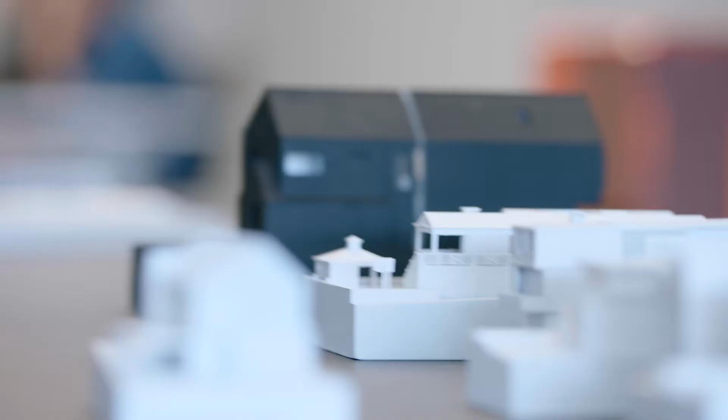We're seeing the architecture community move more toward the model of the film industry, where there are bigger teams, people are more open to collaboration, and rather than a masterpiece being the identity of a lonely expert, it's really the result of a healthy team.

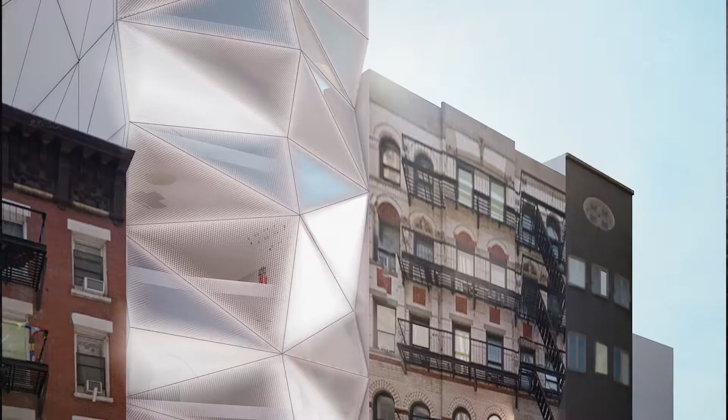If I come to you and say I want to do a building, well that's great. Yeah, but I need it done in 4 months because the bank is charging me interest. If I tell you that's impossible, are you going to listen to me, or turn around and find an architect that will?

Traditionally, the architect is engaged by a developer once the land is secured, but we're pushing on that. We're pushing to have that relationship be cultivated more long-term and earlier so that we can be part of the actual premise of the project itself.

Many developers would approach us and say, what can I build here? Many times they aren't interested in quality, or many times are truncated in their process by the people they owe money to make the project happen.

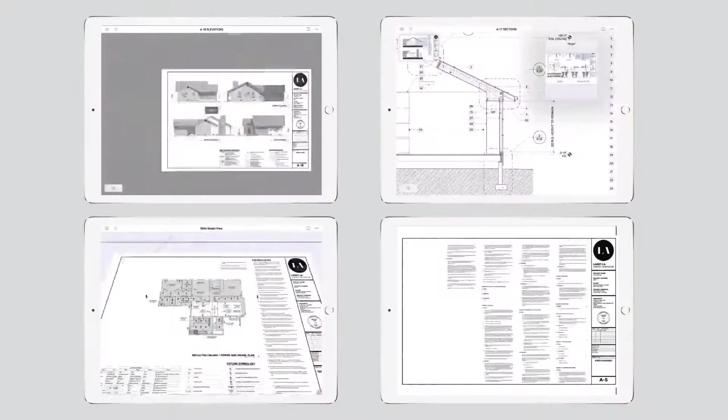I think we're seeing a small reaction to that now, because our workflow enables us to very quickly explore high-level design ideas. We're suddenly upstream and we have a seat at the table in the early conversations. The business owner in me loves that because I can have a seat at the table for a potential client.

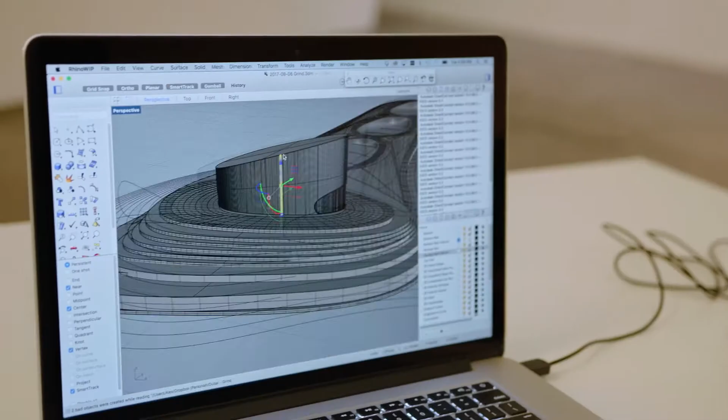But the architect in me likes that because I can not only define the solution downstream, but the premise upstream. If you realize what these clients know sometimes isn't more than a bit of arithmetic and where to get the money, if you take care of that in your organizational structure as an architecture firm, you have a chance of being in control of a project.

What if we purchase the land ourselves, we raise the capital, we build the building ourselves, and we control the economics and the physical reality of the building? In a sense, create a soup-to-nuts, self-sufficient design and development firm.

It takes a willingness of a new school type of architect to want to be able to play outside of the normal box, to be able to collaborate in real time with bigger teams. I like that our industry is going that direction.

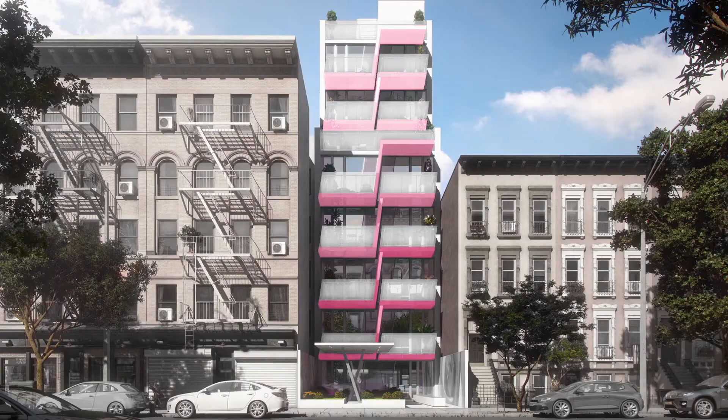We have a real estate and finance team that can find properties and also financially analyze their feasibility in terms of whether or not they're a deal, whether or not they make sense to invest in.

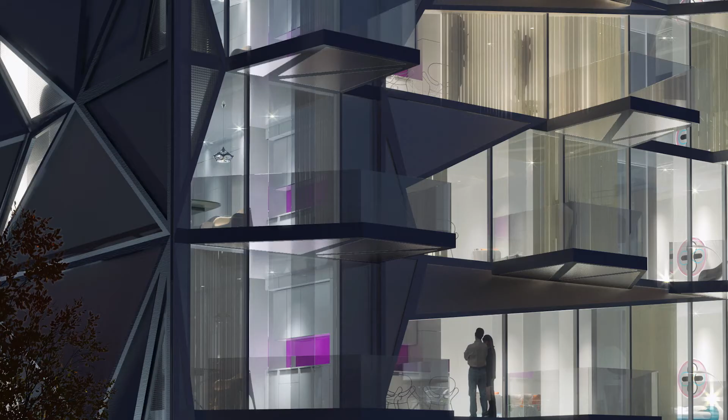Where do we want to invest ourselves as designers? What should our process be, and what tools will we use to reflect that? We wrote specific software in the BIM platform to model buildings quickly, see how much gross square footage you can get out of it, how much net, what your efficiency is of your building.

And then you can value that by knowing what your construction cost is versus what the market price is. We're going to be a good fit for clients who are passionate about the design process.

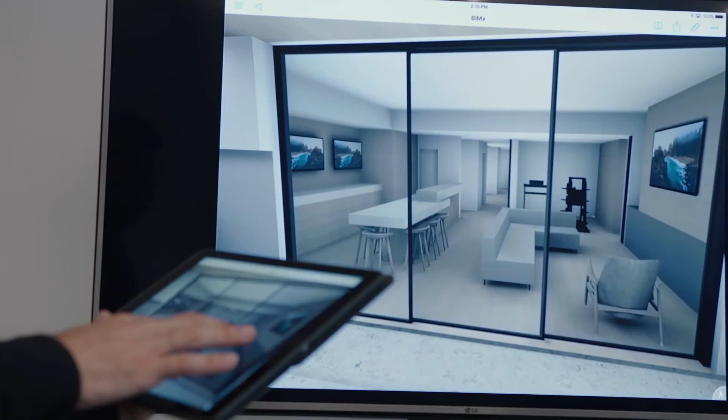We had to set up a studio that had both a technology and a workflow that would accommodate a very fast-paced, very iterative design process. We know where we're going to start to take them, but part of it is improv, where we're riffing off of their answers and their input in real time.

But if it's in-house, you have a direct relationship, and it's much faster, because then you can have someone find a piece of property, and in the same day, someone can tell you what you can build.

Where the community trend is headed, what consumers want, what measure of density is appropriate in certain neighborhoods. It's a real privilege to have that level of impact. And you can make a pro forma based on that assumption.

And in New York City real estate, sometimes you need to make a decision in a question of a few hours, and you have to be ready to buy property within a few hours.

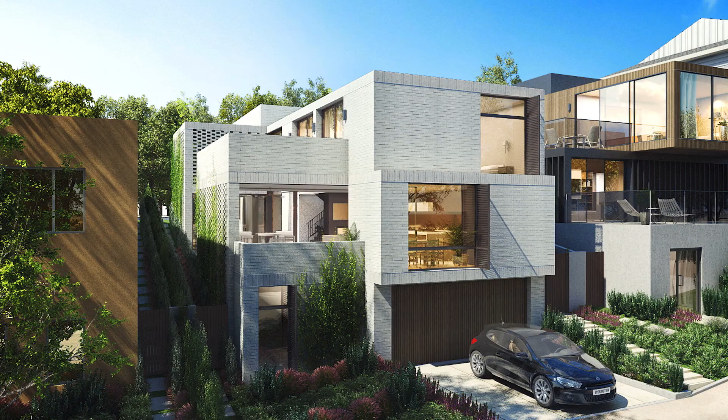As a young studio, we have ambitions to launch beyond that. And so we're making inroads into several commercial projects, and those have their own challenges and opportunities and rewards. We're really hoping that from our residential roots, we can build something that grows beyond it.

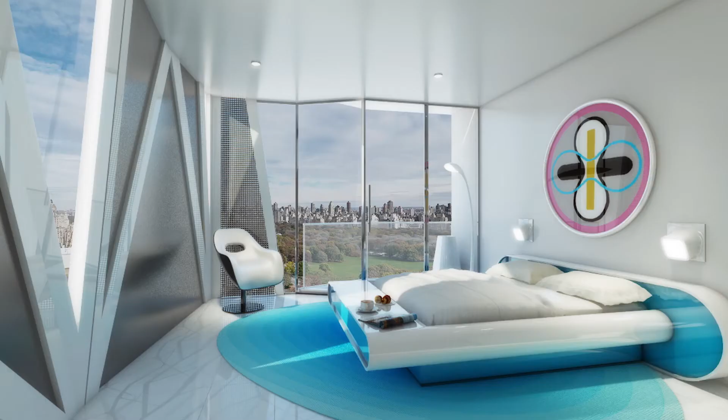So currently we have 7 projects. We have 3 properties in New York City that we own and we are developing, in which we're doing the architecture, we're curating the entire design team, we're filing at the building department, doing all the due diligence of a developer and a design team.

Not everything has to be a one-off trophy masterpiece, but it's really about assembling a body of work that together tells a story. That's beautiful freedom on a project. That makes the difference between grueling work that's underappreciated sometimes and incredibly productive and high-quality work.

If you remove the economic aspect of a project, then you're free to design whatever you want. Now, if you control it, then you have your constraints, but they're your constraints to work with.